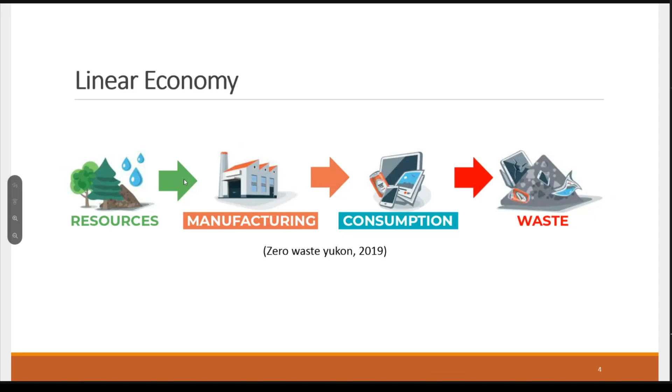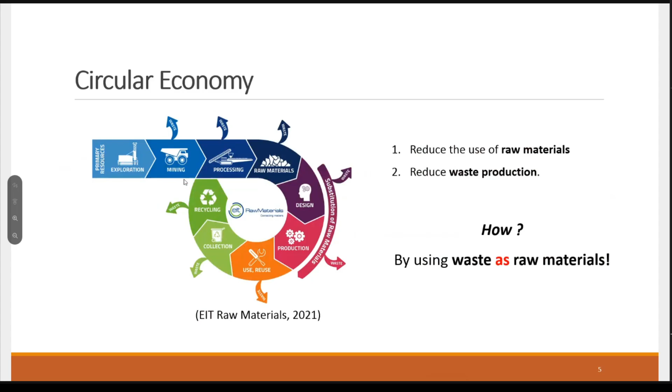So to start, our society used a lot the linear economy model, which is basically we take raw materials, we use them, and we produce waste. But it's not a good solution because we don't have an infinite quantity of raw materials, and we can't produce as much waste as we want. That's why scientists came up with another model, the circular economy, which aims to reduce the use of raw materials, but also to reduce the waste production. And the solution to do it is to use the waste as raw materials.

But we also have to think about energy in the circular economy because we don't want to lose our energy outside the system. So in Canada, we have the 8 most energy consuming sectors that are rejecting 70% of this energy. It's around hundreds of petajoules, which is quite a lot, and it represents 1% of the total primary energy consumption in the world.

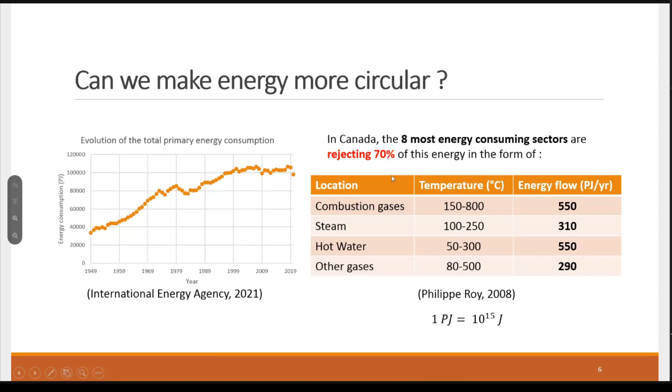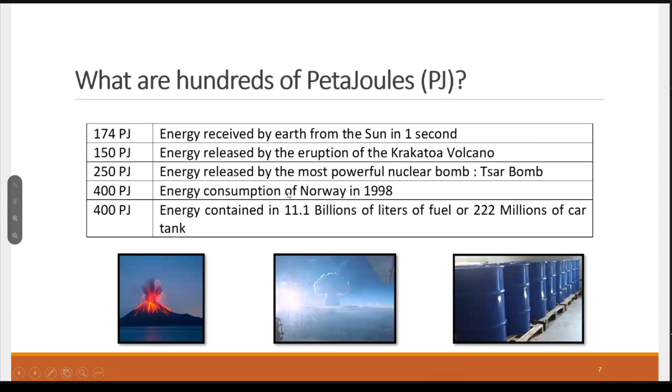I know it's hard to visualize petajoules. That's why I came up with some images to show what it represents. It's, for example, the energy released by a nuclear bomb. It's also the total energy consumption of an entire country, Norway, and it could also fill up more than 200 million car tanks.

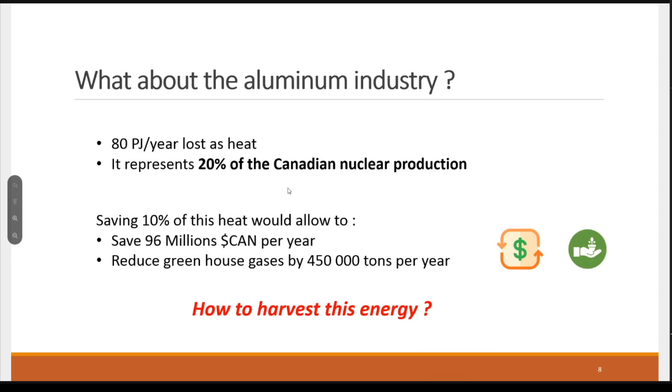If we check the aluminum industry more specifically, it's about 80 petajoules a year, and it represents 20% of the Canadian nuclear production. If we could just have 10% of this heat, it would allow us to save around 96 million Canadian dollars and to reduce a lot our greenhouse gas emissions. But the main problem is how do we harvest this energy? That was the main goal of my internship.

If we go through the objectives of my internship, I first wanted to check the availability of energy waste in the industry, and then, as I said, find some solutions to harvest this energy. Then I wanted to explore the thermodynamic behavior of these solutions and also to build a numerical model for one of these solutions.

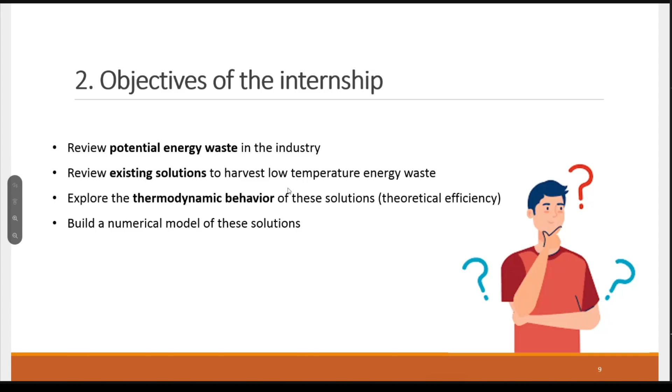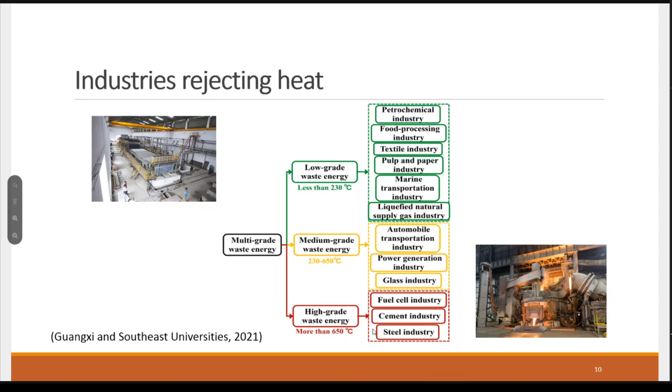So when we check the industries rejecting heat, we have a lot of industries losing heat to the environment. And as you can see, the steel industry is very nice because it's rejecting heat at a very high temperature. And it's good because the higher the temperature, the easier it is to get this energy.

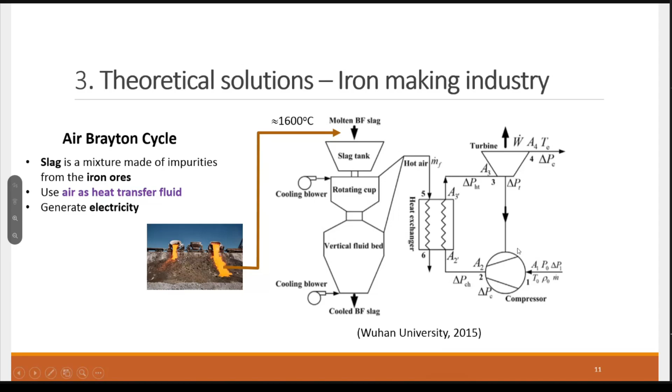Now, if we go through the solutions, we have first the air Brayton cycle. It uses the slag. The slag is like a mixture made of impurities coming from the iron ore. To treat the iron ore, it requires a process which is very hot, and the slag is at more than 1,000 degrees Celsius. So the slag will be used to heat air, and this air will go through a heat exchanger to heat a cleaner air, and this hot air will be used to generate electricity with a turbine.

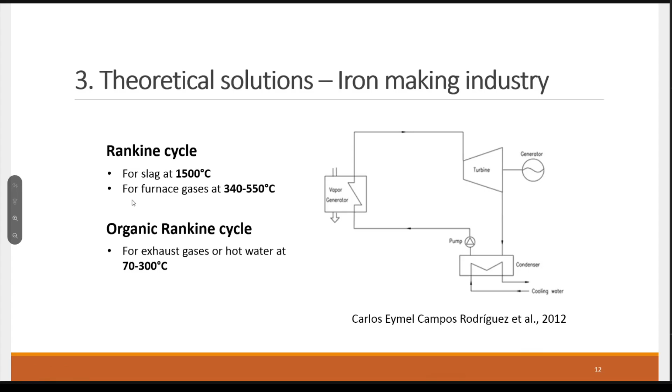To generate electricity, we also have other cycles such as the well-known Rankine cycle. It basically uses water to generate electricity. But the trouble with the Rankine cycle is that it requires making water boil, and sometimes it's not very easy to generate electricity with the Rankine cycle. That's why the scientists came up with a solution. It was to change the working fluid with an organic fluid with a lower boiling point. It's called the organic Rankine cycle.

Another idea to fix that problem is the Kalina cycle, which doesn't use a pure fluid anymore, but uses a mixture of two components. In general, it's ammonia and water. And it's a very nice solution because we can control this process very efficiently, because as we have control over the concentration of ammonia, we can control the boiling point as well. And it's also a bit less expensive than ORC, but sadly there are very few providers for now because it's a new solution.

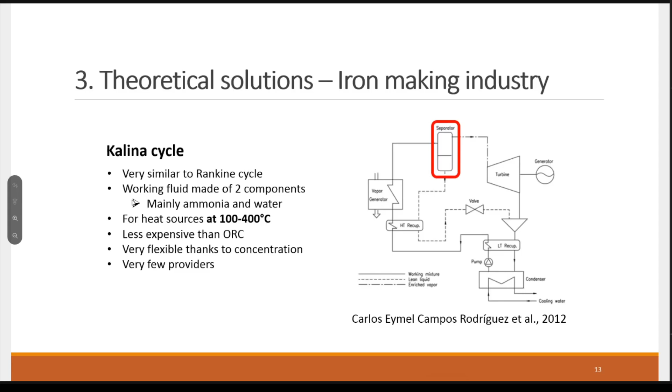Now, as another more specific solution, we have thermoelectricity. It's the same principle as temperature sensors. Temperature sensors produce a differential voltage when there is a temperature differential. But instead of using this differential to know the temperature, we could use it to generate electricity.

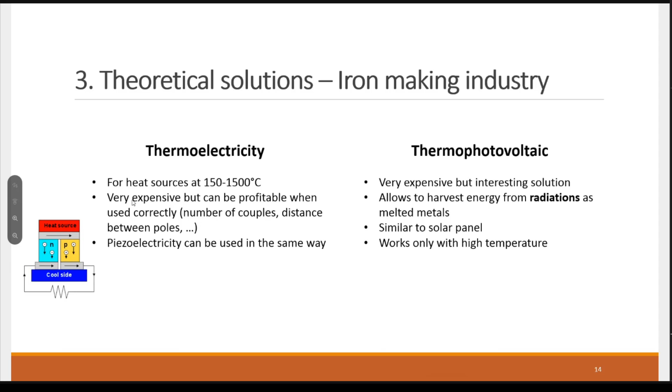We could also use the piezoelectricity effect, which is the same but with the pressure differential. Another very specific solution is the thermophotovoltaic. I think it's very important to check this idea, because it's the only thing I met during my research concerning getting energy from radiation, and very hot processes emit a lot of radiation, so it could be interesting to check this process. It works very similarly to a solar panel.

And now, as a more specific solution, we also have hydrogen generation. It uses three endothermic reactions. That's where we will need to get the energy to make these endothermic reactions work. And it's a very nice solution because, as you can see, it requires copper chloride, but the copper chloride we need for the first reaction we get back at the last reaction, so it doesn't produce any waste.

We can also see the hydrogen generation is in red, but there is also power generation here and here, because the hydrogen generation wasn't taking all the energy. So it shows that it is possible to combine different methods to harvest energy when one method isn't enough.

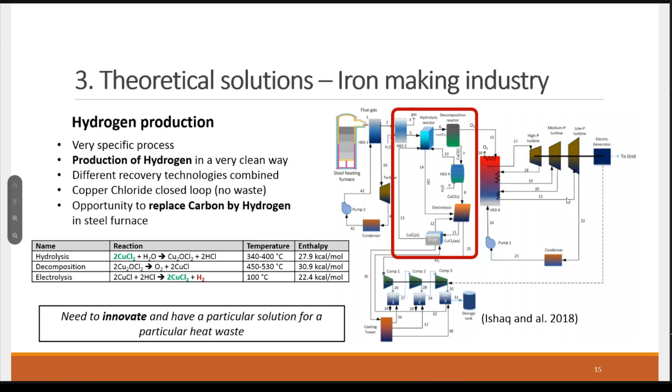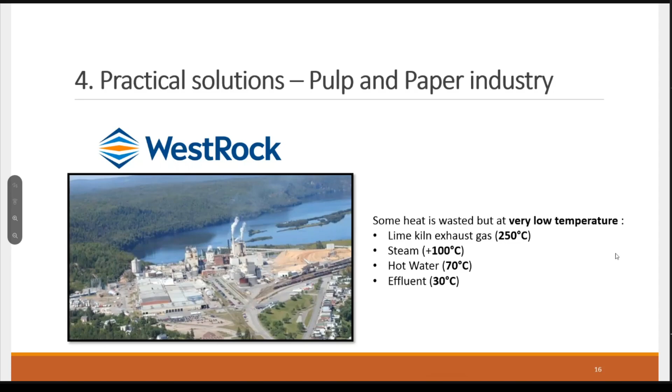Now, if we go through my internship I did this summer in a pulp and paper company, the heat rejected is at a quite lower temperature, as you can see. The exhaust gas is at 250 degrees Celsius. So if we take as an example the lime kiln, I was impressed because there was a very easy way to save energy. So we have here the lime kiln; it requires a lot of heat to transform mud lime into good lime. The exhaust gas comes from the left, and once the heat is taken, the exhaust gases leave on the right.

And as we don't want the heat to leave the kiln too fast, they had chains just before the exit, and the chains just absorb the heat. And as the kiln is rotating, the chains dive into the mud to dry it. So I think it's a very interesting solution because it shows that it just requires chains to save a lot of energy. But the gas leaving the kiln is still hot. That's why I checked making a Kalina or organic Rankine cycle at the end with the exhaust gases. But sadly, it's not interesting economically.

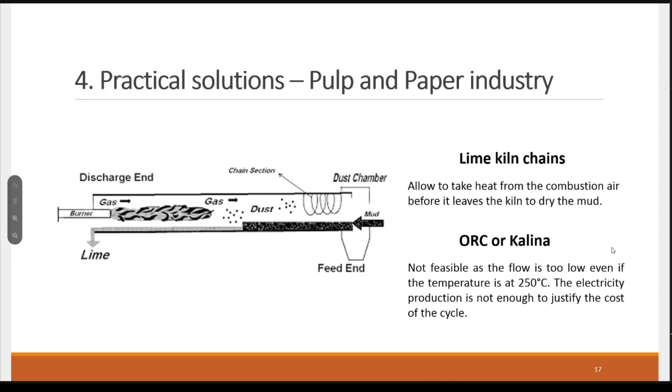Now I wanted to check also another solution. The effluent is at a very low temperature, 30 degrees Celsius, but the flow is very high, making a very high power available, even if it's not that hot. I think it's pretty interesting in winter, but it's very hard to harvest this energy, and the only solution I found is using a heat pump. A heat pump allows us to get energy from a source to give it to another medium, but we need to give it electricity in exchange.

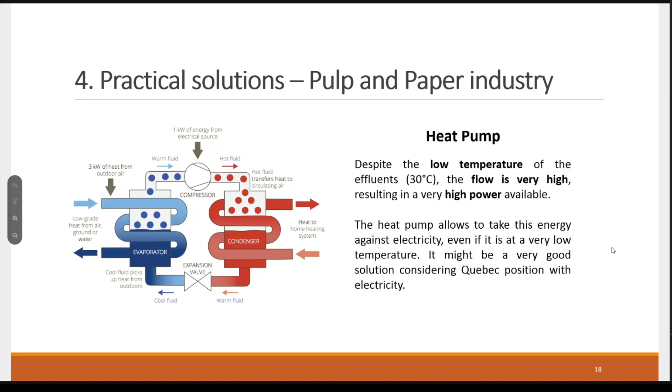It may not be interesting depending on the context, but we are in Quebec and we have a very good position concerning electricity. I think it could be a good solution to use heat pumps to harvest energy, maybe to heat buildings, for example. We are already using heat pumps to heat buildings with cold air or with cold water at 10 degrees Celsius. So it could be very efficient with water at 30 degrees Celsius.

And here is a small chart I got from Hydro-Quebec giving the efficiency as a function of the temperature difference between the heat source and the medium we want to heat. And as you can see, if we want to heat buildings with water at 30 degrees Celsius, we would have a very nice efficiency. So I think it could be a good solution to save energy.

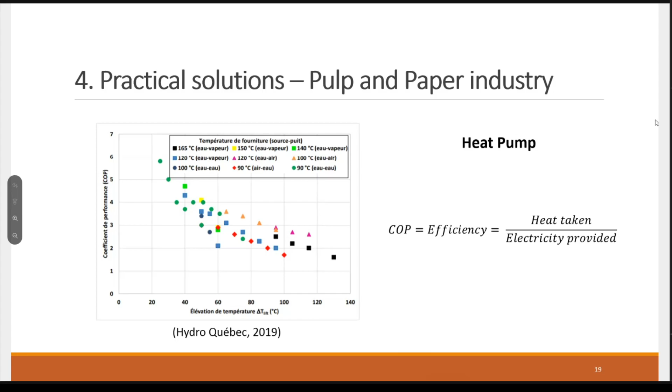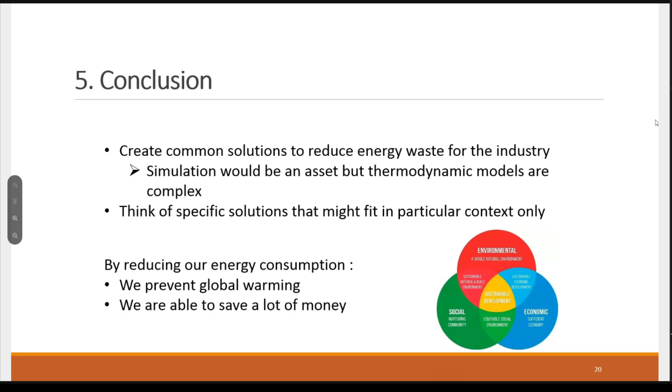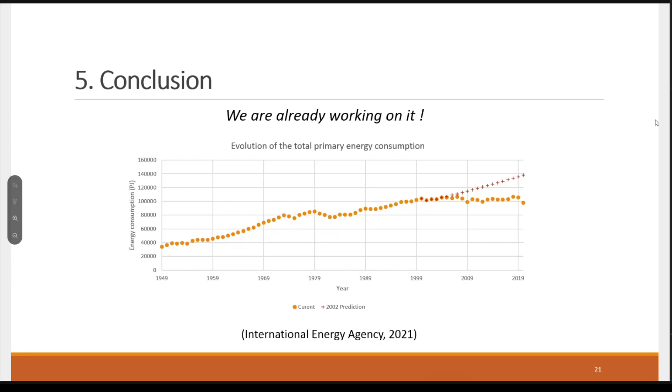And to end on a nice slide, I wanted to show this little graph we saw at the start, but I added some data. The red cross shows the 2002 prediction concerning our energy consumption. And as you can see, we are under this consumption. So it means that we are already working on reducing our energy consumption, which is very nice.